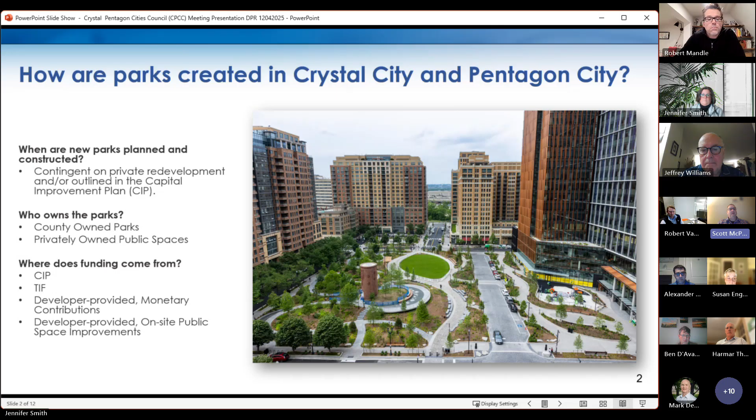In this part of the county, also because of redevelopment opportunities, funding is often from community benefit through private redevelopment. Although some of our park projects may also receive funding from the Capital Improvement Plan and tax increment financing as well. Next slide, please.

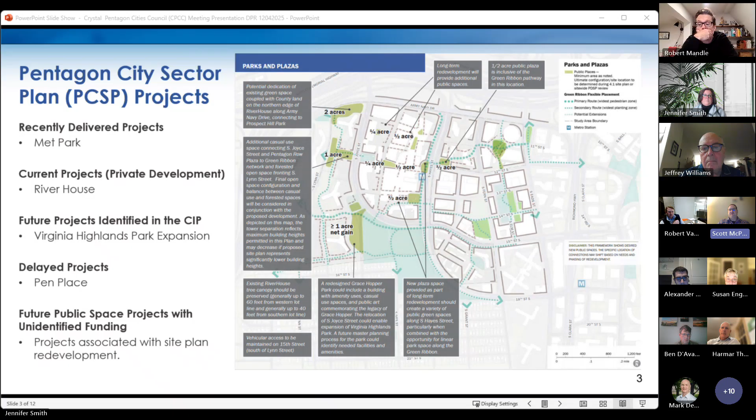The Pentagon City Sector Plan calls for multiple acres of land to be added through various projects. In addition, there's also a green ribbon effort in this part of the county to connect public spaces and other important spaces throughout Pentagon City. So basically, within the Pentagon City sector plan, there are distinct and multiple funding mechanisms throughout the sector plan — the plan doesn't have a one size fits all for funding. Next slide, please.

And the Crystal City sector plan identifies 26 public spaces and parks to be expanded or constructed. Within this plan, the funding sources are not specifically identified. Next slide, please.

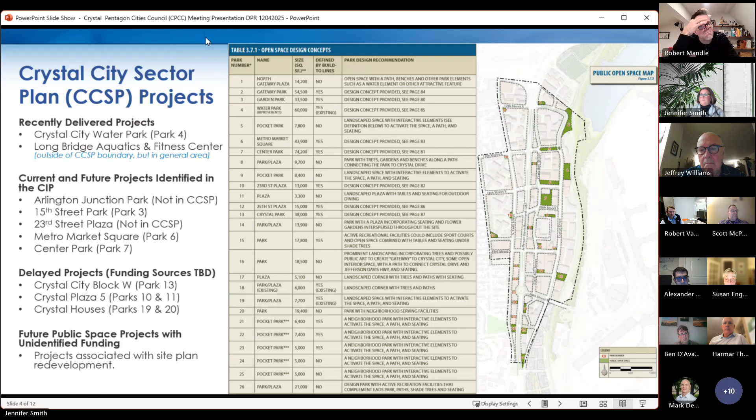The recently delivered projects in this area include Met Park, which was completed in 2023. We also included Long Bridge Aquatics and Fitness Center, even though it's outside of both sector plans, because it's immediately adjacent to the north and because of the magnitude and impact the project has in this part of the county — that was completed in 2021. Crystal City Water Park was completed in 2023. Next slide, please.

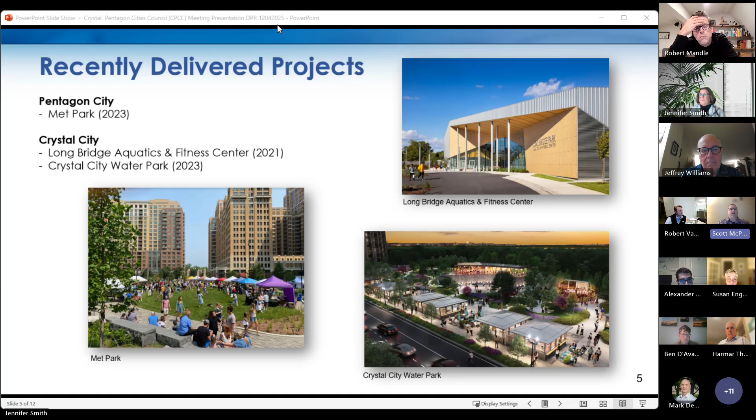Also, Virginia Highlands Park, and that effort will also include a couple of public spaces in the Aurora Highlands area adjacent. This has funds identified in the 2025 CIP, 1.485 million in 2032. This will include planning for Virginia Highlands Park as well as some other spaces. Next slide, please.

Current and future parks in Crystal City. Good news, Arlington Junction Park is opening up really soon, this winter.

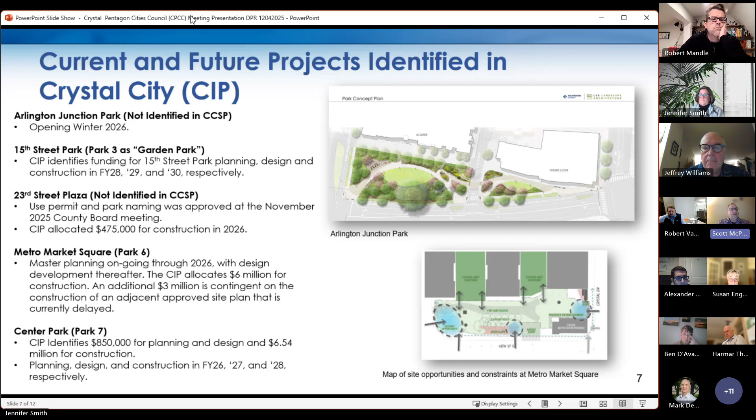Center Park: the CIP has identified $850,000 for planning and design and $6.54 million for construction. The monies are allocated in FY26, 27, and 28 respectively. We plan to start this process in 2026, so early next year. Next slide, please.

This is really self-explanatory: delayed projects in Pentagon City. This is Pen Place, and in the interest of time, I'll assume most if not all of you are familiar with this. If you have any questions, we can circle back. I guess we can move to the next slide.

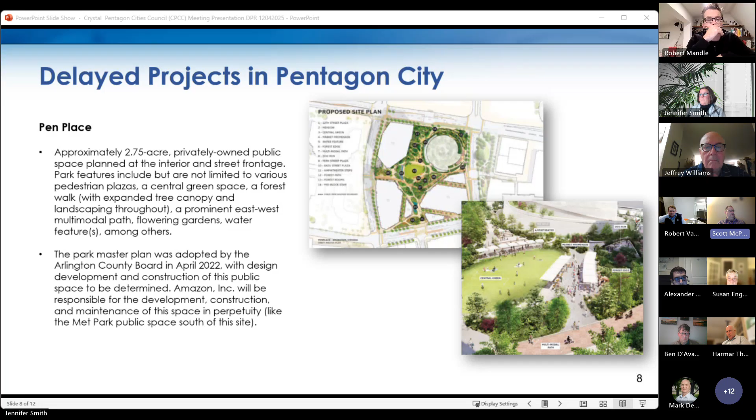Delayed projects in Crystal City. Crystal Plaza 5 was approved in January 2023; that's Parks 10 and 11 in the Crystal City sector plan, and that development is currently postponed. Block W has been on hold since early this year, and the sector plan envisions approximately 38,000 square feet of public space at this site.

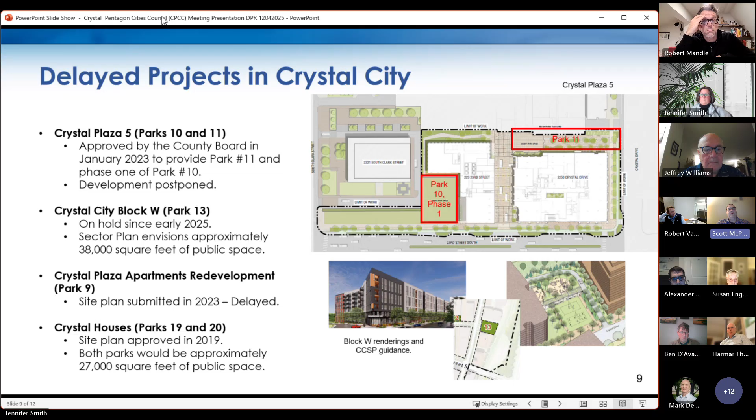The Crystal Plaza Apartments site plan was submitted in 2023, and that is also delayed. Then Crystal Houses, which is Parks 19 and 20 that you may be familiar with—we had some processes for those efforts. That site plan was approved in 2019, but it has not yet moved forward. Next slide, please.

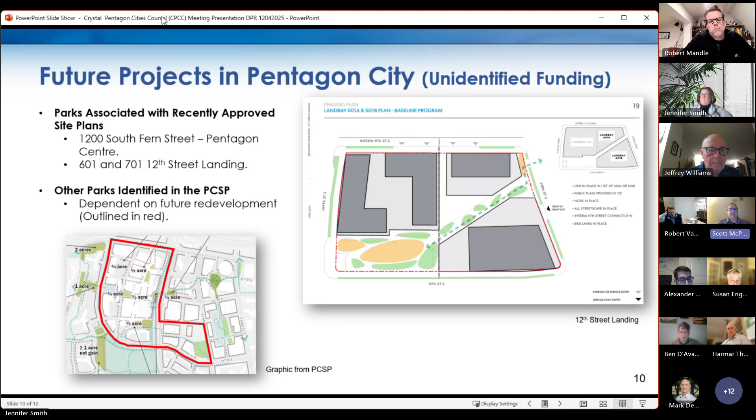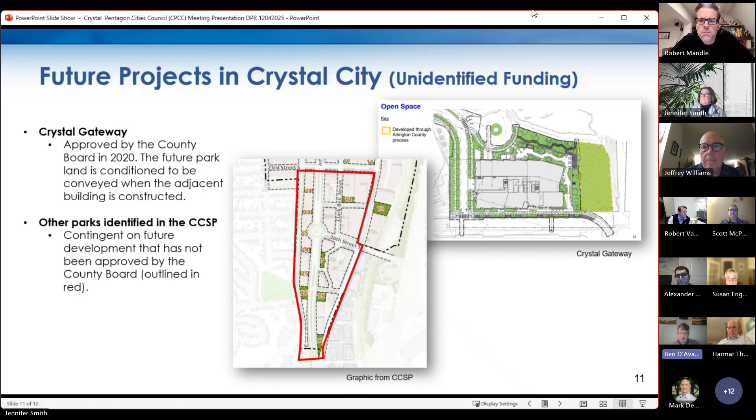My question is in regard to some of the inchstones, particularly you think of a development like River House, one that's going to take quite a while. Is that tied to any slow inchstones as they do one particular element of their project? We're expecting this, as they do this next element of their project, so maybe the park develops as the project develops, or it seems a little confusing as to what the schedule is for when we would see the development of Virginia Highlands Park as a result of River House. I'm wondering, are we creating inchstones for achievement while the overall development is going into place?

Thank you. So if I understand your question correctly, I think the answer is yes, in the sense that you're correct that as the various phases of River House are adopted, there are certain public spaces that will accompany that phase. In terms of milestones for what spaces go with what site plan, I would have to go back and look through the report. I think there is a way forward regarding what the developer - I think the long story short is, through each of the phases, there will be negotiation between the county and the developer for each 4.1 site plan. And depending on that negotiation, we'll receive parks with the associated phase.

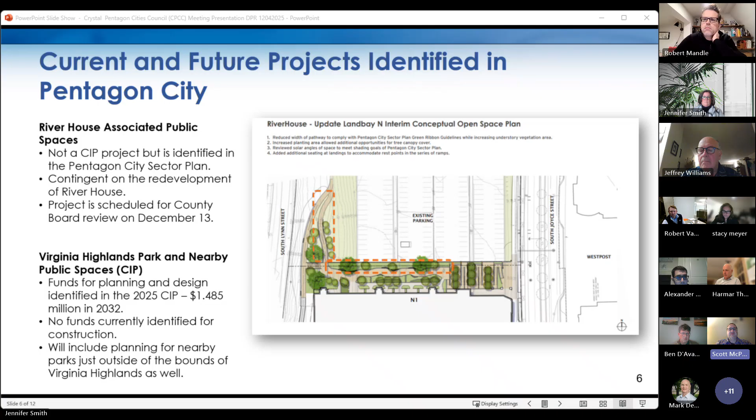That will also be discussed during the Virginia Highlands Park master planning conversation. So for everyone's clarity - let me make sure I'm getting this right - 20th and Ives is a park that is outside of the sector plans. 18th and Ives is where the land that the county got in the land swap would be, I think, part of the discussion.

Can I ask, since I think it is relevant to this discussion, before I turn to you, Robert - does the county have a sense of timing for the River House delivery, with portions delivered in the near term? That is the site plan the county is going to be considering this next weekend, and then long-term portions. From what I understand from the PDSP process, the long-term portions are where we're going to see the readjustment of Little Joyce and the expansion of Virginia Highlands Park, and the potential changes and relocation of Grace Murray Hopper Park.

Given that there's no particular timeline, Mac and Evan, it would be interesting to hear from you too. Given there's no timeline for when the additional provisions of the River House neighborhood plan would be done, does the county have thoughts on this, as someone who participated well over a decade ago in the Envision Courthouse Square process for a park that is still nowhere near on the horizon, on the sense of doing these park master plans that require development occurring with no particular time frame, to help us consider the value of these processes when there's not a park anticipated or funding for it in the near term.

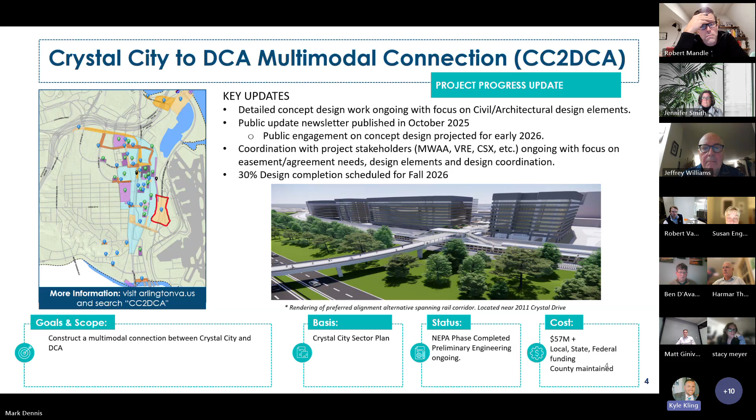Over the course of 2025, the main focus has been coordination with key project stakeholders, predominantly the underlying property owners for the structure, with a focus on easement agreement needs, design elements, and coordinating designs for various projects ongoing within the project area. We're targeting to be complete with 30% design in the fall of 2026, but we'll have some public touch points along the way to help inform that design. Next slide.

As most people know, Arlington County is the project lead for CC to DCA. There are several key partners we've been working with throughout the project, including underlying property owners such as the National Park Service, the FAA, or MWAA for DCA property, and the rail corridor, which includes VRE, CSX, VPRA, all of which have easement interest in that area, as well as our funding partners at Federal Highways, VDOT, and NVTA. Next slide.

This project touches several key adjacent projects which will help form the multimodal connection we're striving for. There are several projects within the rail corridor ongoing, including the Alexandria Fourth Track project being administered by VPRA, and the Crystal City Station project that VRE will undertake in the next couple of years. There are also projects at the airport constructing new recirculation ramps within Ronald Reagan National Airport that our project has been coordinating with, to ensure our designs are complementary to one another but also don't conflict. Next slide.

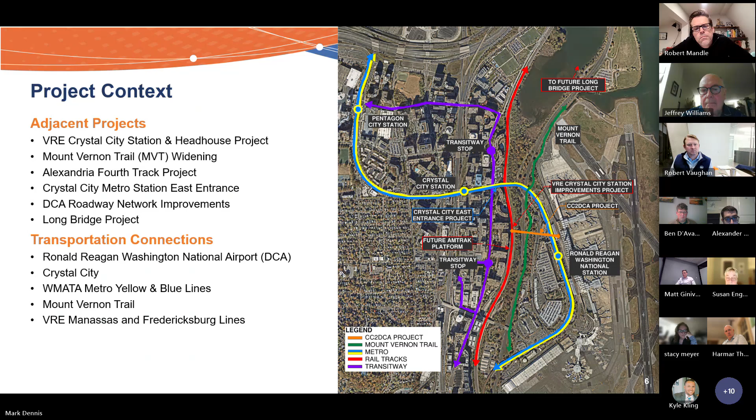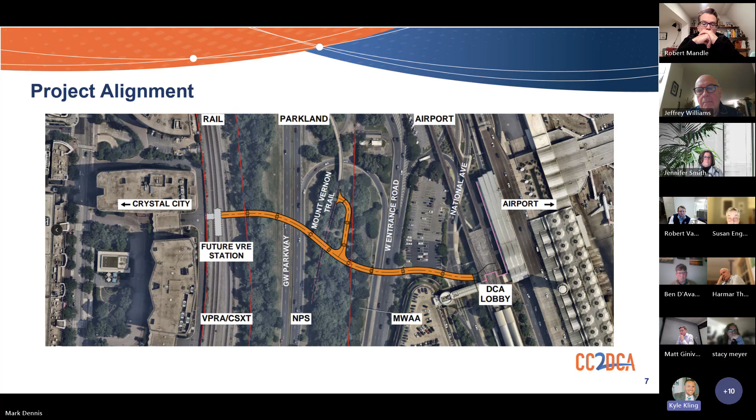So on this slide, a general overview of the alignment. We start at 2011 Crystal Drive, where we tie into the future VRE station head house and the rail corridor. We'll span the rail corridor before entering National Park Service land at the GWMP, George Washington Memorial Parkway. We'll have a curvilinear alignment across the parkway as well. Within the parkway, there will also be a direct link from the structure to the Mount Vernon Trail before we enter the airport property, where we'll have a continuation of that curvilinear alignment that wraps around the north end of the Terminal 2 parking structure before tying into the Terminal 2 Metro Rail lobby for the eastern terminus of the project.

This slide recaps where we've been over the past 4.5 years since the county initiated the project. We kicked things off in July 2021 with our first larger scale engagement. Since then we've had 5 subsequent engagements dealing with things from preliminary concepts to design priorities, which we recently had in January 2025 as our last engagement. As I indicated earlier, we are targeting our next public engagement in the February timeframe of early 2026, where we'll have a continuation of our design elements and ask more pointed questions related to the civil design and architectural design of the structure.

The next couple slides recap some of the high-level comments we received from key project stakeholders, predominantly coming out of that winter 2025 engagement, but also over the course of 2025 as we continued conversations with those. This slide talks about the Section 106 signatories.

For those not familiar with the Section 106 process, that relates specifically to historic preservation. On this project, the county entered the Section 106 process due to the impacts the structure will have on the George Washington Memorial Parkway and the Mount Vernon Trail. As we've presented various concept designs for the structure, the signatories to the process have provided comments. The Park Service wants the structure to be as context sensitive to the parkway as possible, meaning something light. They want the county to consider a lighter color to emulate older cement concrete or other structures within the parkway. They do not have a preference for a canopy on the structure, and they want the impact of the structure, predominantly the piers, to have a minimal visual appearance to those traveling within the GWMP.

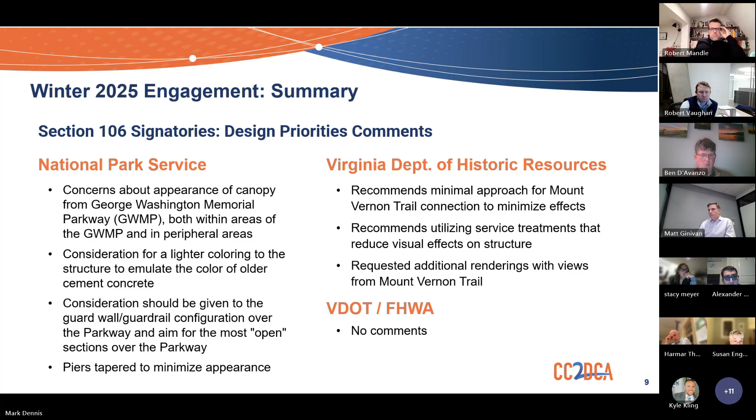We've also received comments from the various underlying property owners. In this case, even though the airport property is owned by FAA, MWAA has a significant lease that allows them to make larger scale decisions for infrastructure crossing their property, so they've been providing comments to the county as well. They prefer a structure that is fully covered or enclosed, with a roof or canopy on top and fencing or some type of protection from the elements on the side. They do support the curvilinear alignment shown on the previous slides, assuming there are no impacts to any other future plans or underlying properties.

They prefer a weathered steel type of design aesthetic, similar to what is being designed as part of the Long Bridge project. They're also open to increased or additional amenities at DCA as part of the project, whether that's additional bike lockers or an expanded pet refuge area at the connection to the Terminal 2 lobby. For the entities within the rail corridor, predominantly CSX and VRE, we'll be incorporating a fully enclosed, fully covered structure to prevent any type of projectiles from being thrown onto the railroad tracks in that area. That's a specific requirement of CSX, so there's no flexibility on that—we're locked into having a fully covered structure in the rail corridor given their design requirements. VRE also desires that the design for CC to DCA be complementary to the design of their Crystal City Station improvements, which we're coordinating further with VRE.

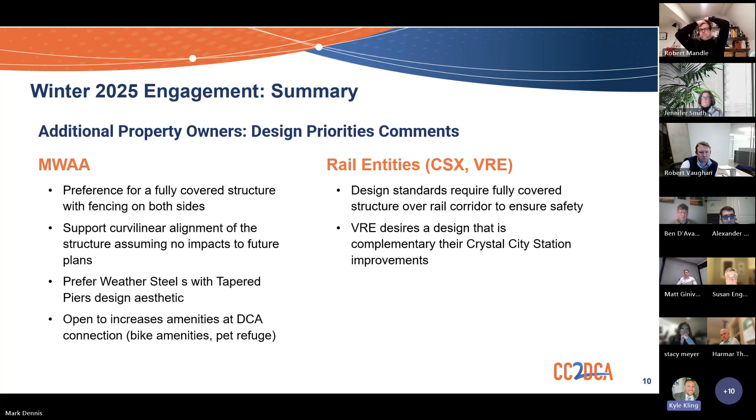We've also received some comments from the National Landing BID. They would like to see a well-lit landscape connection that incorporates a continuous canopy. They would like the design element to be contiguous as it crosses the various property owners, predominantly with a focus on something that is more modern in design and builds civic pride.

The design should complement and enhance parkway settings as well, was another comment we received from the BID. And then they want the connection to be highly accessible, predominantly from Crystal Drive and through the VRE entrance.

Comments we have received out of this last engagement in January of this year show that the general public has a large focus on safety, including lighting. It was close, but the majority of individuals said they would like separated bicycle and pedestrian markings or facilities within the cross section of the structure. There was a strong desire for the structure to be covered for protection from the elements or weather. Additional amenities should also be considered, such as bike rentals or bike racks, benches for respite, and things of that nature.

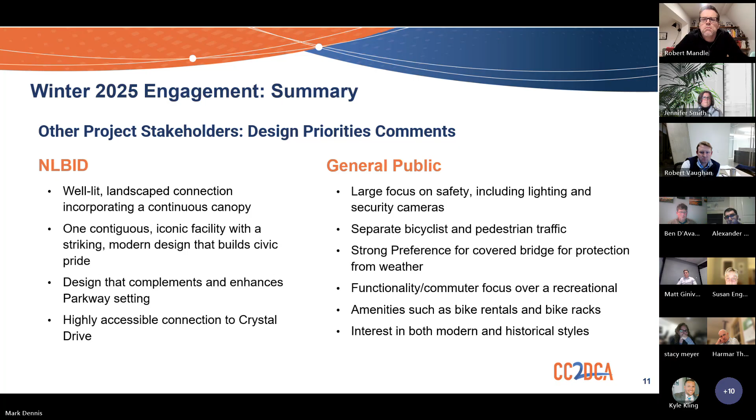As we take a look at those comments holistically and weigh the varying commitments and design requirements we're facing, we came up with five distinct design principles that are going to help guide this design as we move it forward out of a conceptual design phase and into more of a detailed design phase. Those are shown on the screen.

First, we want this to be a distinct destination, something that's welcoming and memorable. We want it to have a positive user experience, so something that is comfortable, functional, and safe.

As we've indicated, we've made a commitment to the National Park Service to design a structure that is context sensitive, predominantly in the area of the parkway and the near periphery. So something that's light to the touch, but also integrated into the landscape as well.

We will also make a commitment to having design clarity, so something that's a unified experience as you traverse those three very distinct properties. And then lastly, as we work our way through the design phase, we need to be mindful of our budget and the constructability of the structure as well.

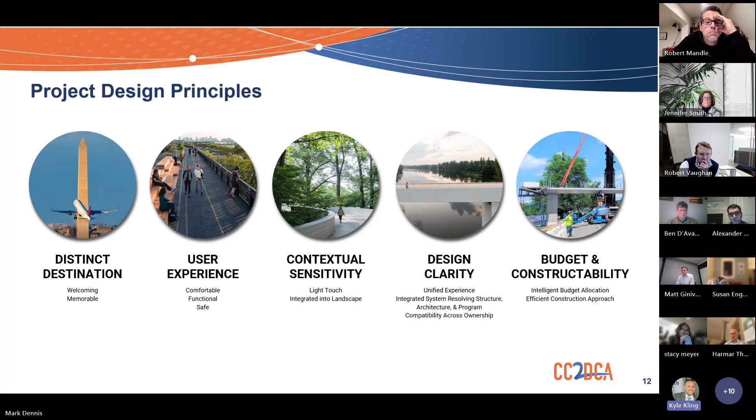To give an update of where we currently are as we've been having these conversations related to design, we haven't been neglecting actual design work. We've done some geotechnical work out there to take a look at the soils and make sure they're suitable for the type of structure we desire.

We received a draft geotechnical report in October. I don't have any glaring deficiencies with that, so we should be in a good spot to move forward with continuing our structural design for the bridge.

We've also been taking a closer look at the stormwater management. Some of the underlying property owners have pretty specific design requirements in terms of where stormwater can be discharged or whether it can or cannot be within their property. So we've taken a closer look at that, and those analyses are ongoing.

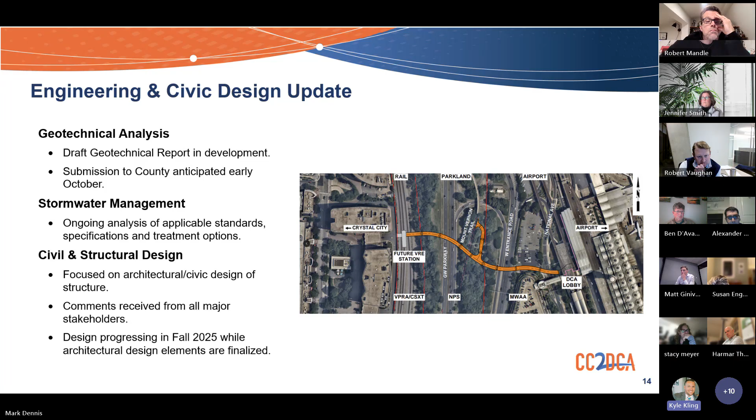As I mentioned, the predominant focus over the past year has really been on the civic and architectural design of the structure. So we've been looking at the architectural design, the civic design. We've been reviewing those comments that we've received from the various stakeholders, and we're continuing to progress our design forward where we can, given that feedback we received.

Next slide. And so this kind of gives a look ahead to what we will be engaging on in February at a little bit higher of a level.

On the left-hand side of those screens, those are the elements that we know are already defined, right? The alignment that was shared previously, where our pier locations are going to be, how wide the structure is going to be. It's going to be 20 feet of usable width with about 22 feet of actual width of the structure.

Things that are going to be up for consideration as we move through this architectural design phase are going to be things such as, is the structure going to have a canopy on it? What's that canopy going to look like? Is it going to be fully enclosed?

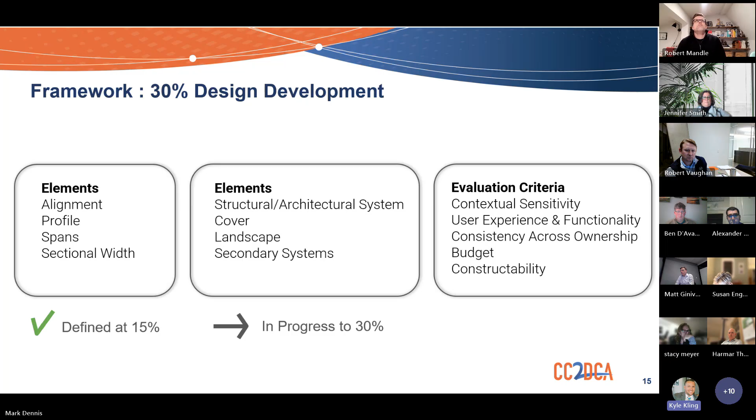Is it going to be a partial canopy? What type of landscaping are we going to have on the structure, or adjacent to it to make it complementary? What types of materials are going to be used to construct the bridge? What are the piers going to look like? Things of that nature. And then lastly, pointing back to those design priorities, how do those impact the user experience and functionality? How do we ensure consistency across the structure and across those various properties? We're mindful of the limited budget for this project, and making sure this is actually constructible without significant impacts to the various property owners.

Two more slides. This gives a look, highlighting the things I mentioned on the previous slide that we'll be looking at during our next engagement, types of finishes or colors to the structures, canopies, fencing, railing, lighting, things of that nature, and some more detail related to the substructure design, such as how the piers will be shaped, how bulky or light they'll be, what type of facade they'll have, or what materials they'll be made out of.

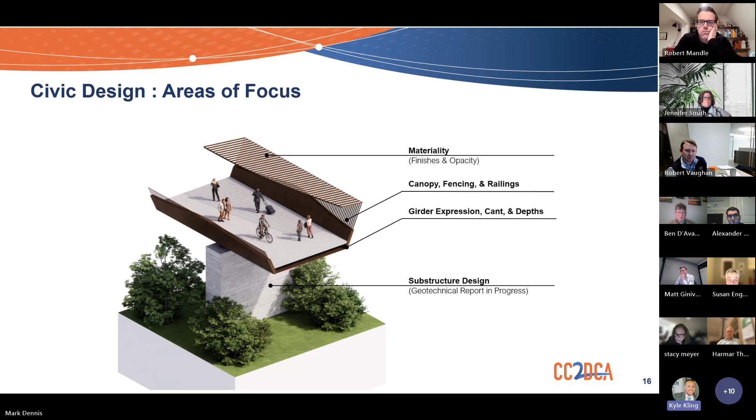Last slide here, a recap of where we've been and where we're going. February 2026 is what we're targeting now for that next series of design engagement. Coming out of that engagement, our goal is to turn around a 30% design submittal to our key stakeholders and underlying property owners in late spring or early summer of 2026, before wrapping up the final 30% design for the structure sometime in late 2026.

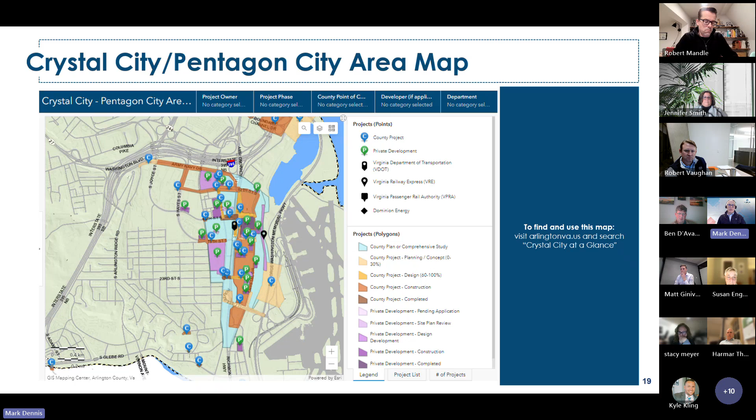Great, thank you. I think I will move rather quickly in the interest of time. I know the group has a lot of business to tend to. So most of us here are probably familiar with our area map for our project work. We're going to be touching on some of these in fairly rapid fire fashion.

I'll start with the projects that are presently in design. Our 15th Street Complete Street project extends from Joyce to South Hayes. The current phase comprises sidewalk improvements, corner work, crosswalks and bike lanes along 15th between Joyce and Hayes. We're currently at 100% design, and we are working through some easement negotiations, and construction is slated for summer of 2026.

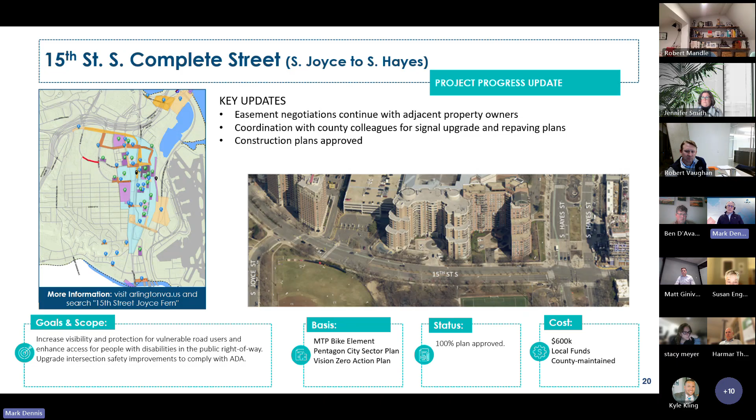The Long Bridge Drive multimodal connection, there's been a little discussion on this earlier. This one really helps set the table for VPRA's proposed Long Bridge, the pedestrian bridge that's in the works in tandem with the proposed rail bridge project. The design target end date is spring 2027, and procurement is slated for winter of 2027. We anticipate a tentative construction start date of spring '28, with a conclusion we're mapping out into fall 2029.

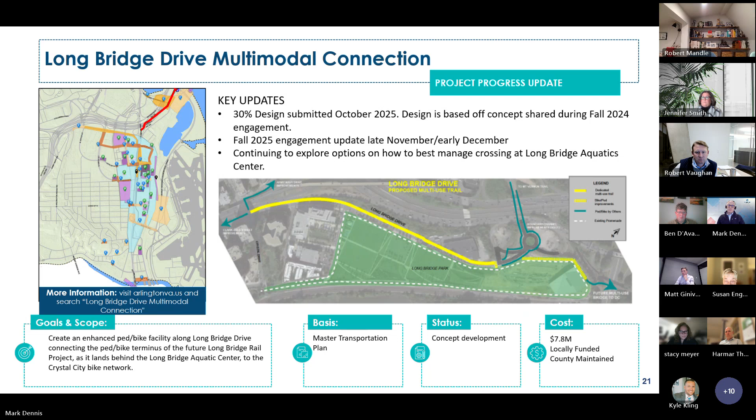The 18th Street South realignment, this is Clark Bell to Crystal Drive. This realigns 18th Street between Route 1 and Crystal Drive. This project comprises new sidewalks, ramps, street lights, street trees. It helps enhance multimodal connectivity and coordination with the Crystal City Metro Station and the proposed future VRE station. We're working through final design through spring of 2026, and we anticipate construction to start no sooner than the summer of 2026.

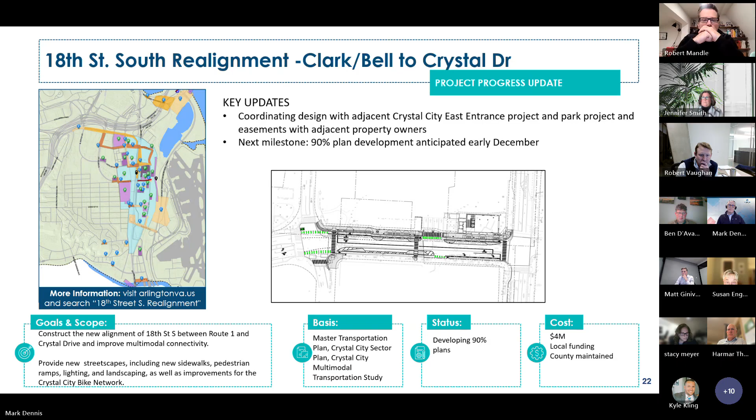The Arlington View Connector Project, 30 years in the making, is now reaching final design. We're in final review now for the next steps to prepare for procurement over the winter, and if everything goes well, we're looking to begin construction probably mid to late summer next year at the earliest. Of course, all of this tonight is pending CIP work that we're going through right now, so we'll see, fingers crossed, how things go. But it looks like we're on track for summer of 2026.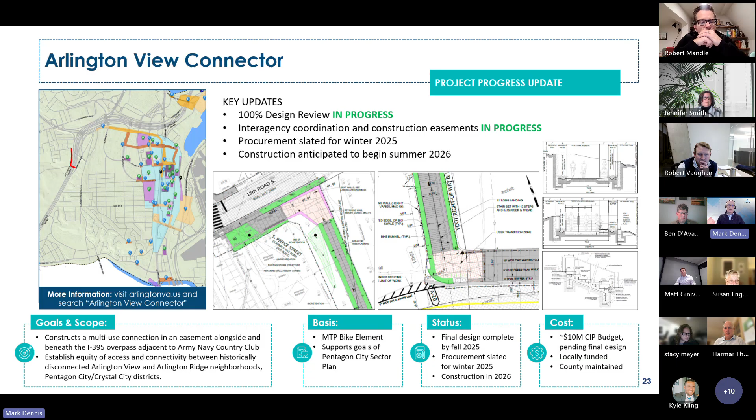For county capital projects in construction, I will pivot directly to South Eads Street. We have two phases to this complete street project. Phase 1 extends south from Army Navy Drive to 12th Street.

This extends the bike lane up South Eads to Army Navy Drive with new curbs and pedestrian enhancements. There's a boardwalk segment that parallels and is integrated with the adjacent Junction Park project, currently under construction, and that project is also nearing completion. The remaining work on this phase includes final asphalt in the roadway section, new markings, signage, and soil placement for tree plantings. We anticipate all of this reaching substantial completion by early spring next year.

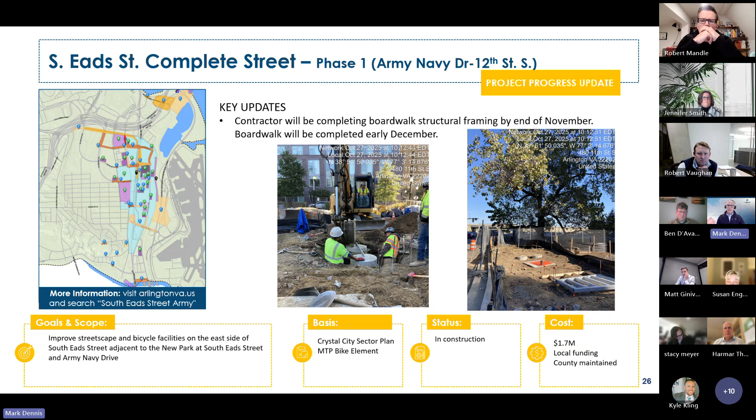Phase 2 of the South Eads Street Complete Street project is nearing completion as well. This project realigns and buffers the existing bike lane north up the northbound side of South Eads from 15th to 12th Street. It relocates existing bus facilities and completes pedestrian facilities undertaken by the Met Park development on the west side of Eads Street. The completed work so far includes new roadway asphalt, markings, signage, and streetlights.

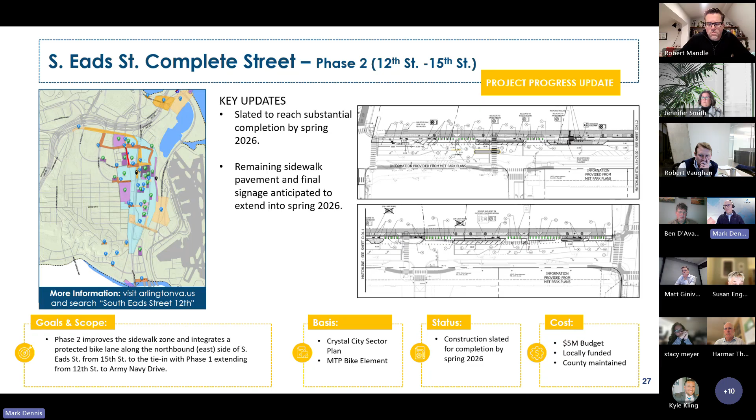Along with new concrete driveways, ramps, curbs, the buffer elements for the bike lane, and a new floating bus island with a new shelter. The remaining work to complete includes a new paver sidewalk zone, which we're slating through the winter, and we anticipate substantial completion on this project in the spring of 2026.

The Army Navy Drive Complete Street recently reached substantial completion. We had our ribbon cutting in late October. We have a few remaining punch list items, including some streetlight energizing, and we're coordinating closely with Dominion on that work. We hope to have final completion and administrative closeout of this project later in the winter.

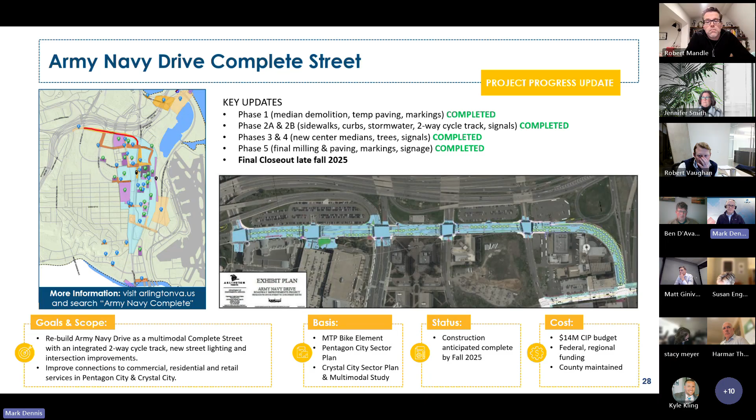The Army Navy Drive Protected Bike Lane completes what we consider a missing link in the bike lane network along Army Navy Drive. It replaces the existing separated directional bike lanes with an extension of the two-way cycle track west from Joyce Street. This project also helps establish safer pedestrian crosswalks, with a new series of floating bus islands at Lynn Street, as well as in front of the Horizon House condominium.

This also utilizes the Nash intersection for a high visibility transition of this two-way bike cycle track to the north side in order to link with the Arlington View Connector project at Memorial Drive. This project also creates new bike-ped crossings and a three-way stop at that Memorial Drive intersection, allowing us to integrate bus, bike, and pedestrian users from all directions. Construction is underway, slated to work west from Joyce up Army Navy Drive, and we anticipate substantial completion by spring of 2027.

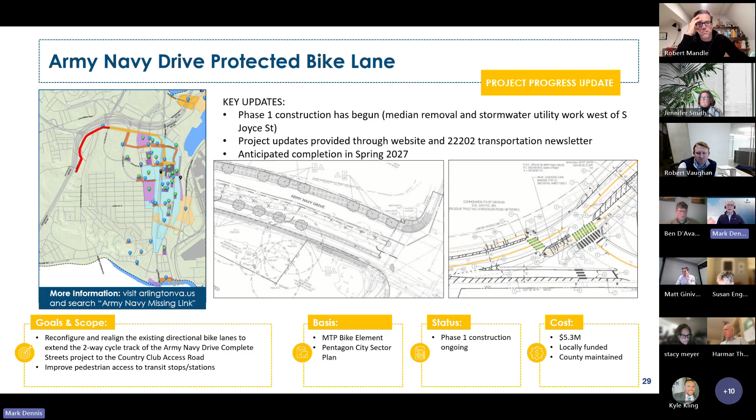The 15th Street South, Clark, Bell Street Realignment Project also helps us complete the street grid in Crystal City by connecting a realigned South Clark Street with South Bell Street at 15th. There's also a rebuilding of 14th Street on a tighter, smaller scale to help maintain hotel service access from Crystal Drive and Clark Street.

This also helps establish space for the future 15th Street Garden Park that we heard about earlier, and also helps implement new transitway operations along South Clark between 12th and 15th. We anticipate substantial completion on this by late fall of 2026.

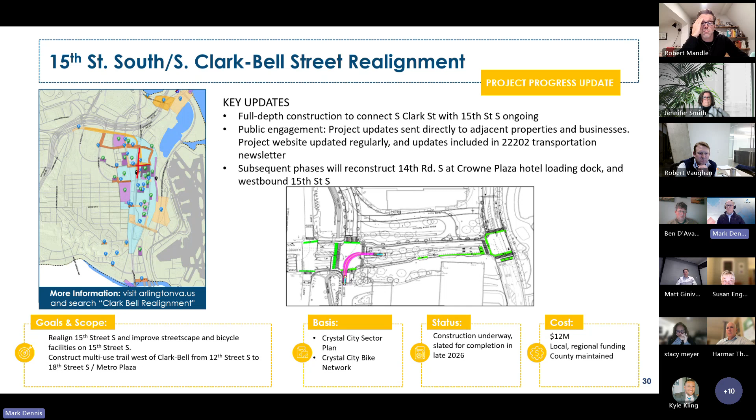The transitway extension to Pentagon City, segment 2A, is in active construction. We're in ongoing coordination with the National Landing BID regarding some site beautification measures. Those are largely in place. We're having a few issues with the wind and working closely with our contractor to keep those in proper shape.

All dry and wet utilities on this project are nearing completion. A good portion of the concrete work is almost complete for the center running bus lanes, as well as the floating bus islands. The signals installation work is underway with foundations going in. We anticipate installation of poles and other signals components later in the winter and into early spring.

Final asphalt, paving, markings, signage, and all remaining amenities are slated to go in also in the spring of 2026. We anticipate reaching substantial completion at that point, with resumption of transitway operations through this new segment by late summer, which is roughly when we anticipate final closeout on this project as well.

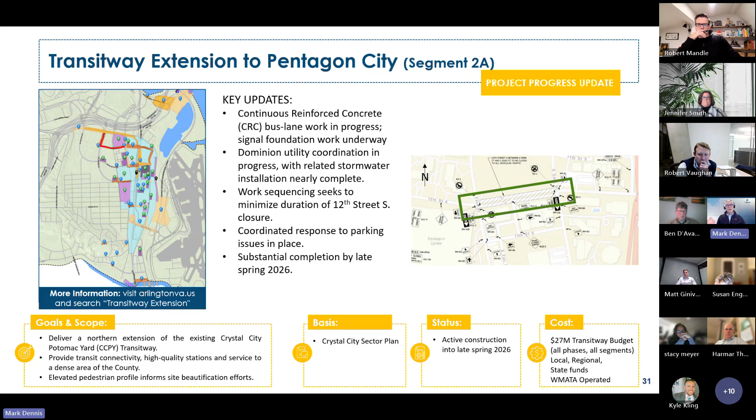The Crystal City Metro East entrance progress is steadily moving forward, with the bulk of weatherproofing and major concrete work completed in the fall. We are now beginning and underway with major exterior structural work, a lot of steel work anticipated through the winter and well into 2026. There's also major interior work, MEP work, mechanical, electrical, et cetera, anticipated throughout 2026.

There are a number of known station closures across a period of about 10 weekends from February to June of 2026, and there will be shuttle services provided to help navigate those closures. WMATA is continuing to conduct ongoing engagement with the public to maintain awareness of this project status and all of the shifts in service they anticipate. We also anticipate substantial completion on this by spring of 2027.

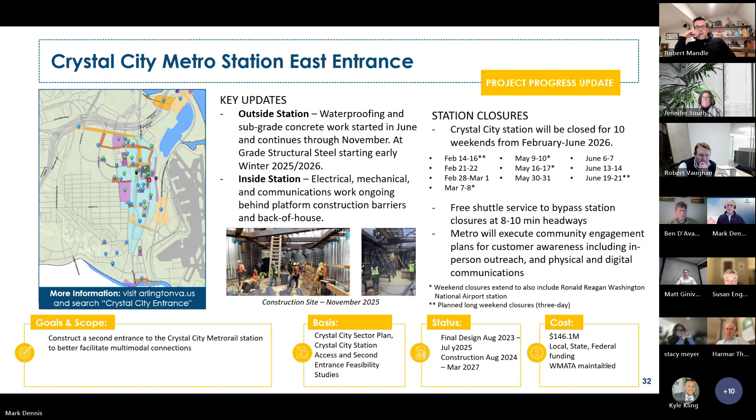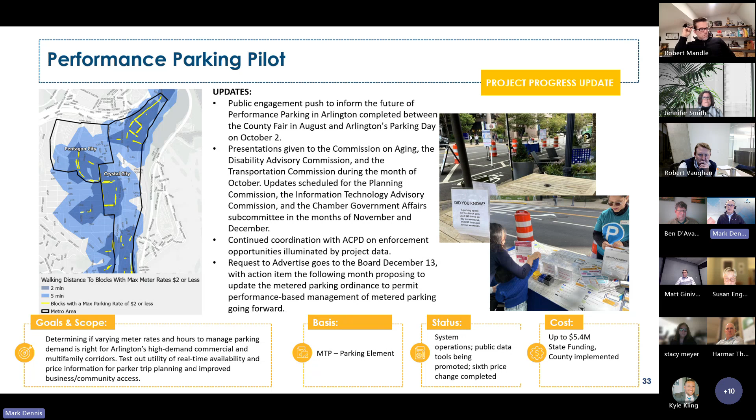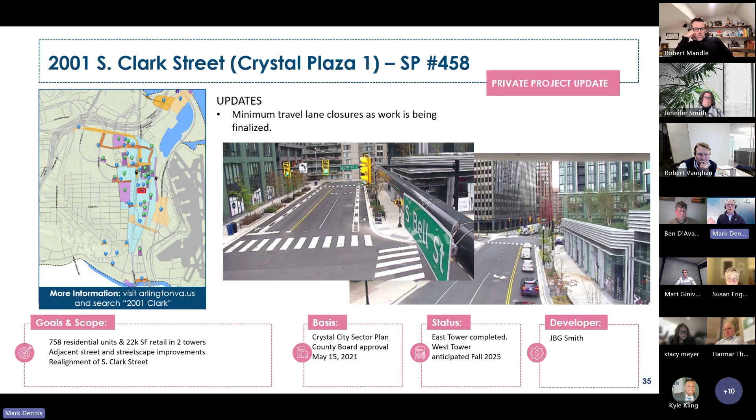Pivoting quickly to private developments, I apologize that Joanne couldn't be here. I don't have a lot to add to the 2001 South Clark Street Plaza, except that the West Tower was anticipated completion for fall of 2025, so I understand we're still awaiting that to finish out.

For the Dominion substation mentioned earlier, the county is very aware of the importance and value of resolving this project, given the slow pace of work in getting Dominion to complete a lot of this work. The timeline for this was originally fall of 2025. We understand we haven't reached that yet, and we continue to stress this with Dominion. We will continue to monitor and update everyone as best we can on this. I wish I had better news, but that's the status of it right now.

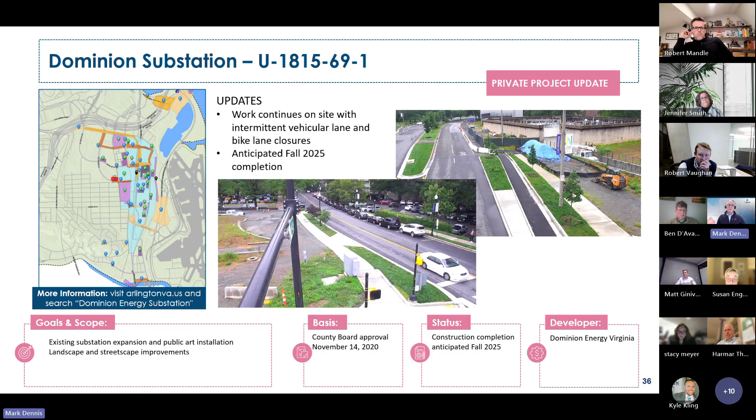As far as completed projects, we've had quite a few in the past year. I won't go through all of these, but a couple of key elements are segment 1 for Transitway, as well as the Boundary Channel Drive interchange. The Pentagon City Metro Station's second elevator is also a big one to note. On the private side, Met Park phases 6 through 8. Amazon HQ2 is still outstanding, but the Crystal City Water Park we heard earlier has also been a very popular destination now with its completion.

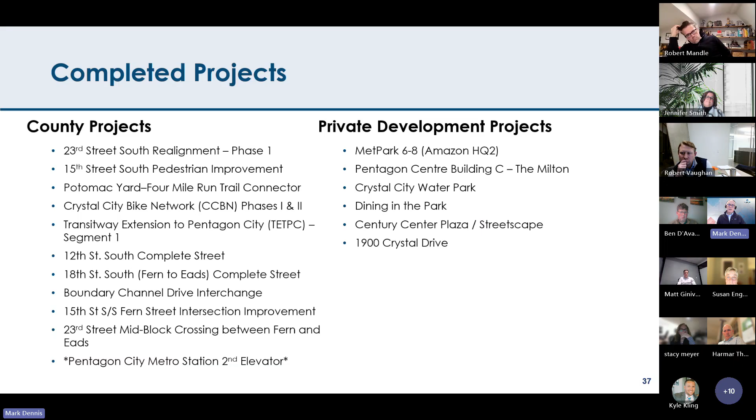In terms of public engagement, we've had the big push this fall with Arlington's Transportation Future. We're still working on some things regarding that. With the CC to DCA project, as we heard from Kyle a minute ago, we're looking for an engagement early in 2026. We have ongoing construction updates for all of our Crystal City and Pentagon City projects. We use Nextdoor and the National Landing BID as our key stakeholders on this. We have DES social media fully engaged, and we invite everyone to continue to stay informed and connected with all of our engagement opportunities and our newsletters.

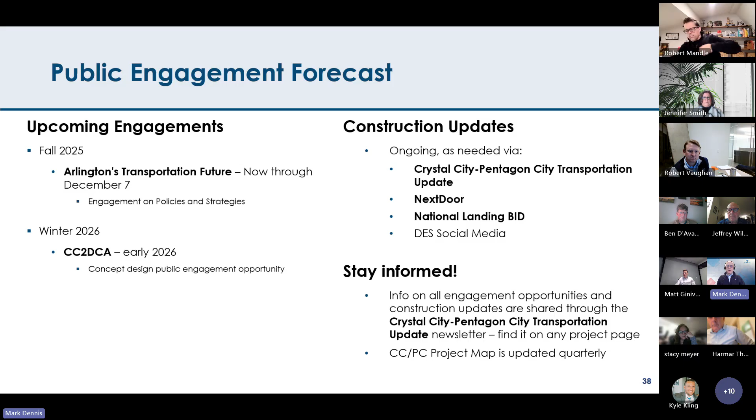And with that, I hope I didn't eat into too much official time.

No, thank you very much to you and your team, Mark. I think we'll do maybe separate out questions and comments from each project area. We'll do Crystal City first this time and maybe then Pentagon City. So if you have questions or comments relating to some of these projects in the Crystal City area, you can raise your hand and go on camera. So I see Matt first.

Thanks, Ben. Kyle, what's the significance of the 30% marker on the CC2DCA design?

Yeah, so it really sets the high level design elements, right? So what the structure is going to look like, where the pier locations are going to be, what the width of the structure is going to be—those types of design elements that are really needed to start progressing some of the more significant aspects of a design. For this particular project, the significance is also that it will be the point in time where we break from our existing contract with our designer on board now and begin a separate delivery phase for the project, which will include going out to bid or procuring services for a new designer and potentially a new construction firm at that point in time.